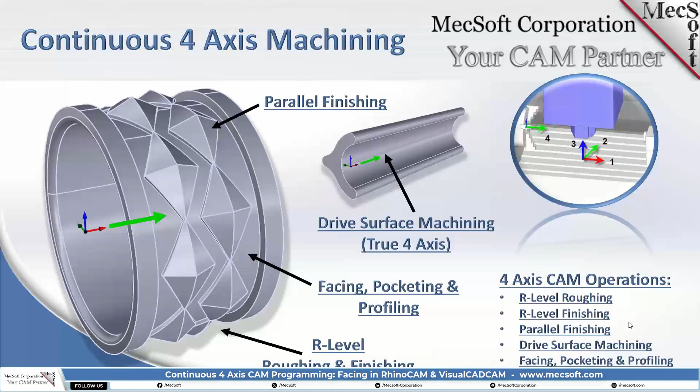And we're going to be looking at parallel finishing in 4-axis. And then also we mentioned drive surface machining. We're going to be showing you another part for that. And then facing, pocketing, and profiling. Okay.

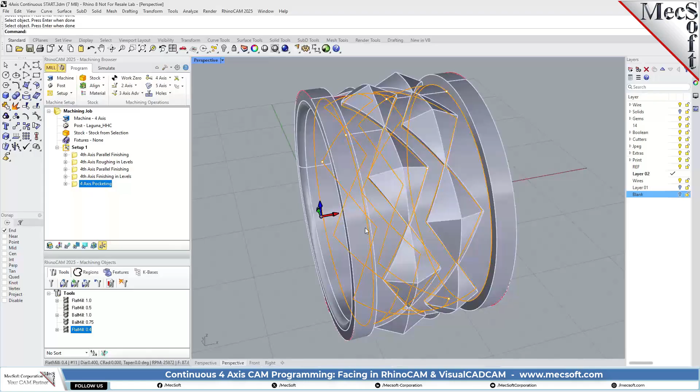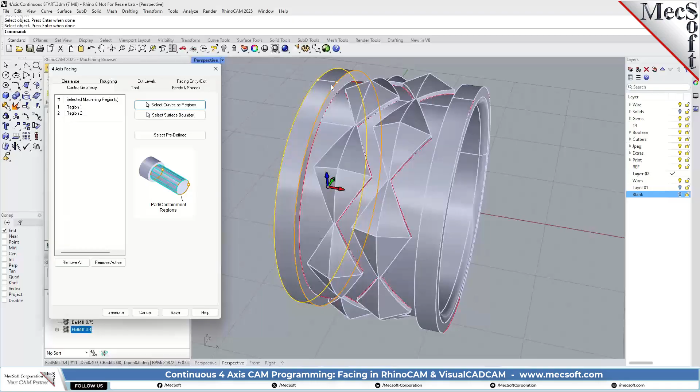Okay, so let's do facing and profiling. So we got these two flats on each side. We're going to use facing on one and profiling on the other. So we're going to go 4-axis facing. For facing, you do have to select geometry. So we're going to pick this curve that I have selected, and then we're going to pick this inner edge here. So we're going to face between these two curves.

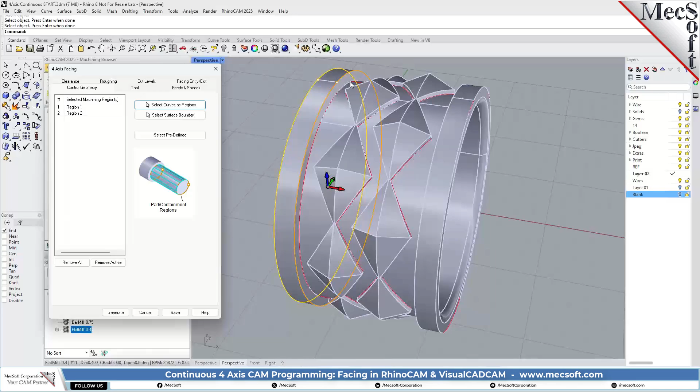If you correlate this to 2-axis facing, where the axis of the tool will go right up to and stop on the boundary, that's very much the same in 4-axis, where the tool axis is going to come up to this curve and stop. So half of the tool will hang over this side and half of the tool will hang over this side. So in this particular part, you just need to be careful that you're not coming so far over that you clip these areas right here. So your tool radius needs to stop somewhere in here.

Okay. So we're going to use the 1 millimeter flat end mill. For the roughing tab, we got a tolerance of 0.03. Our stock is 0. And we're going to do an island offset, which means it's going to be just offset from the curve this way. And we're going to do a mixed cut direction so it can cut both ways. And we're going to do a step over 25% of the 1 millimeter tool.

Again, in our cut levels, we're just doing one level. Obviously, if you were cutting this in gold, say, you would want to have multiple small step downs. But we're just doing it in one level, so it doesn't matter whether it's set to at top or at bottom. We've got all these set to 0. And for the facing entry and exit, we have a ramp entry and just a straight retract.

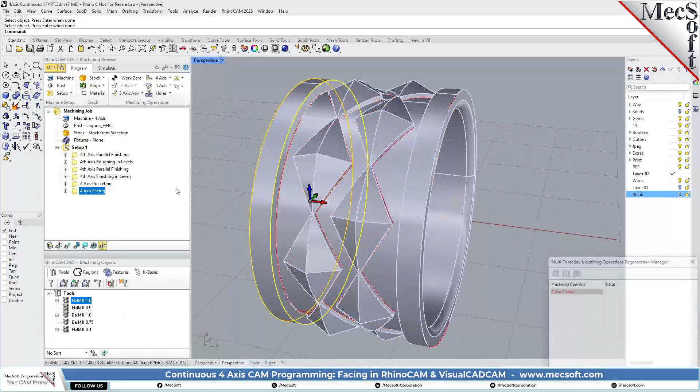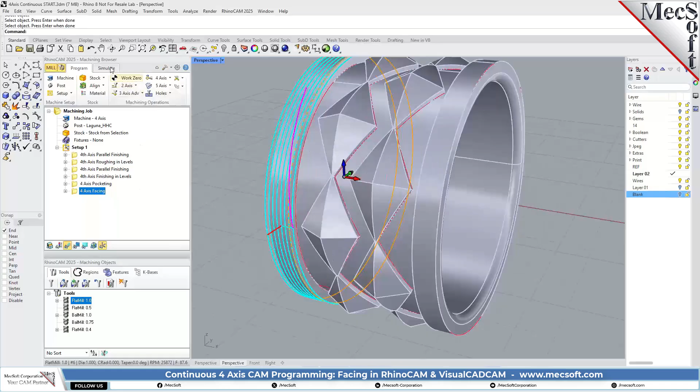Let's look at that. So you'll see here we have our ramp entry down to the cut start point, and it's working its way around, and one retract. Okay, let's simulate that. Let's turn that off. Slow this down a little bit. Let's change that color. Let's play that.

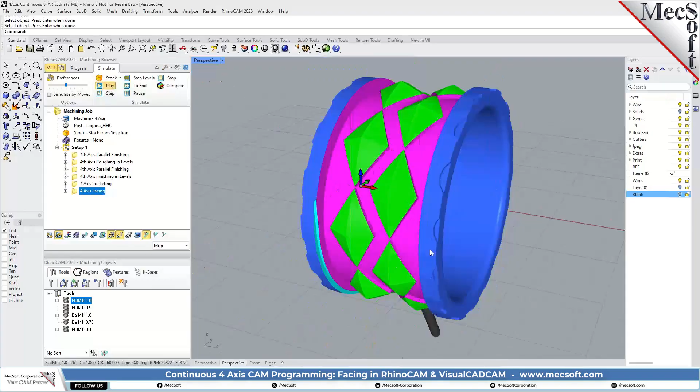So we ramped in right here, and it's cutting both ways. Our mixed cut direction. So there's our facing cut pattern.